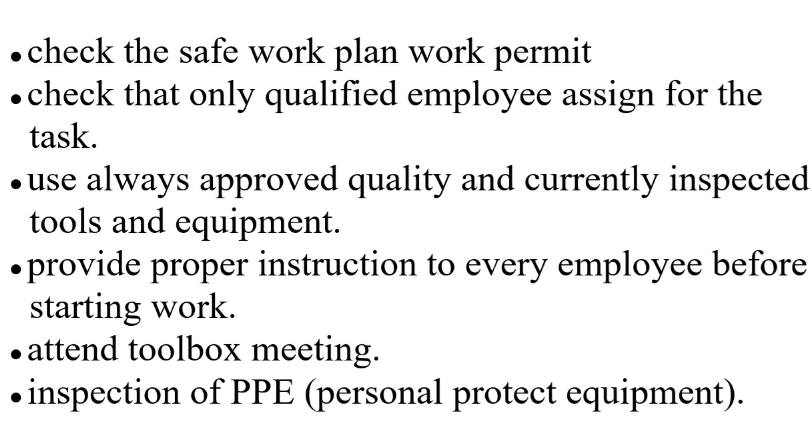Attend toolbox meeting. Inspection of PPE, personal protective equipment. Inspection of power tools, hand tools, fire prevention, fire extinguishers, powered generators etc., correcting unsafe conditions. Inspect signs and barricades. Inspection of color code system. Gas testing if work in confined space.

Visit the job site, check condition of work and practices of people. Report any accident and incident immediately to safety manager. Provide awareness about safety among employees. Prepare daily safety report. Check the grounding of machine connection, especially working under overhead lines and in the vicinity of substation.

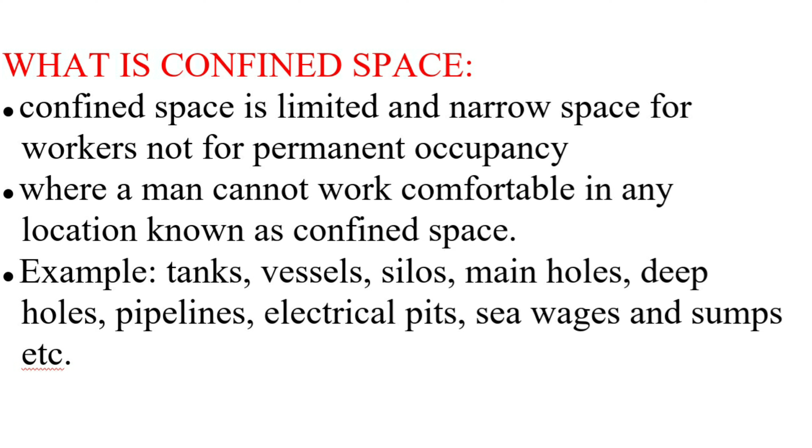What is confined space? Confined space is a limited and narrow space for workers, not for permanent occupancy, where a man cannot work comfortably, in any location, known as confined space. Example: tanks, vessels, silos, manholes, deep holes, pipelines, electrical pits, sewages and sumps etc.

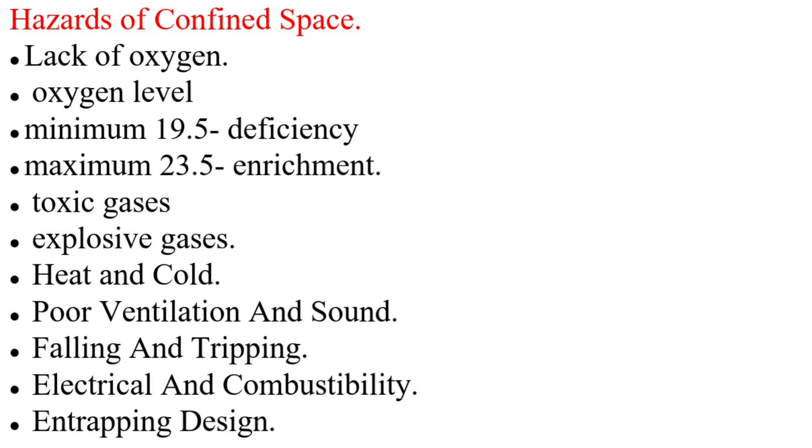Hazards of confined space. Lack of oxygen. Oxygen level, minimum 19.5% deficiency, maximum 23.5% enrichment. Toxic gases, explosive gases. Heat and cold. Poor ventilation and sound. Falling and tripping. Electrical and combustibility. Entrapping design.

Prevention precaution of confined space before entering, confined space entry permit. Check the oxygen level, between 19.5% to 23.5%, gas testing, LEL, lower explosive limit, the minimum concentration of combustible and flammable gas or vapor that will ignite if an ignition source is present, LEL 0.05% to 0.5%. Carbon monoxide, 0%. H2S, hydrogen sulfide, 0%, barricade.

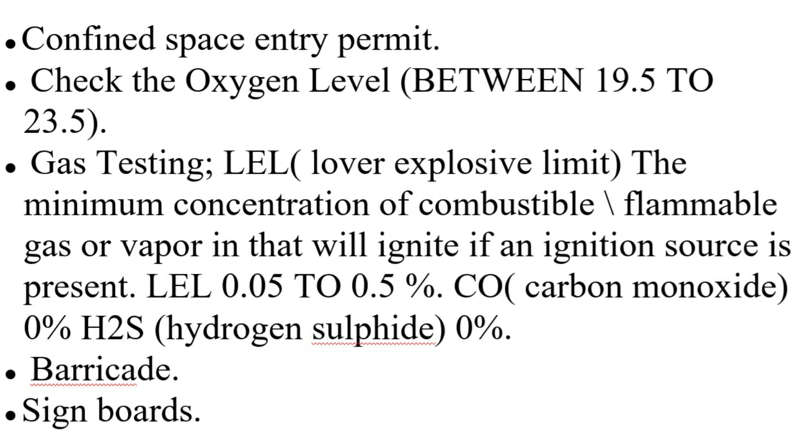Signboards. Lifeline and communication. Emergency fire alarm. Safety access. Air horn. Proper PPE. Ventilation, air. Illumination, proper light, inside confined space 24 volts, keep all material out of space and only tools mentioned on permit may enter. Welding gas cylinders are not permitted inside the confined space. After completion of work or invalidity of permit, install no entry.

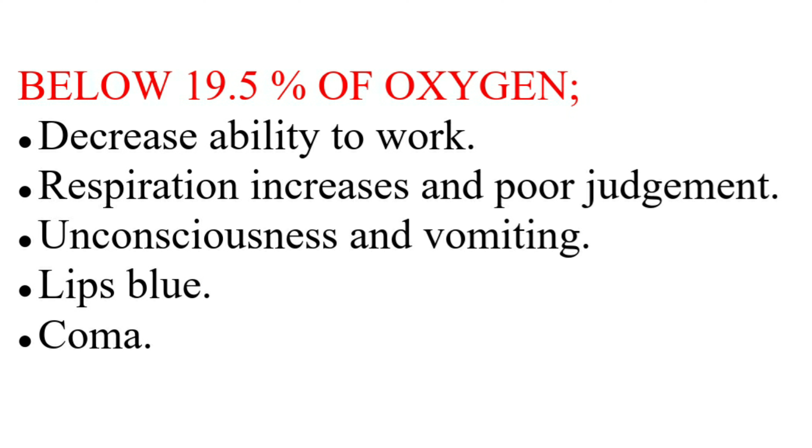Below 19.5% of oxygen, decreased ability to work. Respiration increases and poor judgment. Unconsciousness and vomiting. Lips blue. Coma.

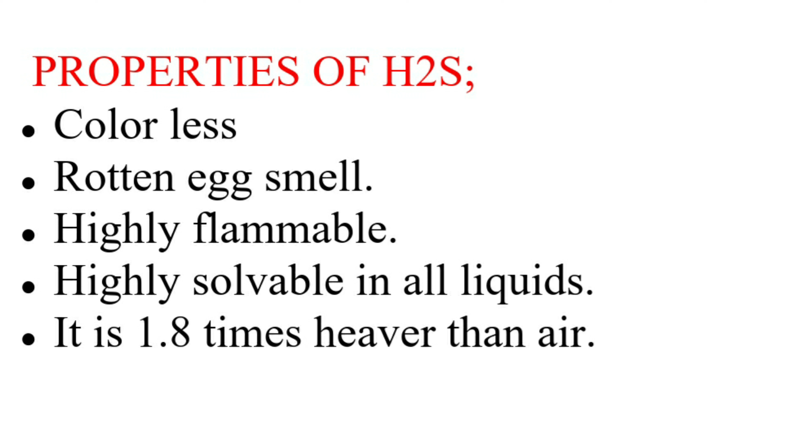Hydrogen sulfide, H2S. H2S is one of the toxic gases and it is very harmful to the human body. Properties of H2S: colorless, rotten egg smell. Highly flammable. Highly soluble in all liquids. It is 1.8 times heavier than air. Effects of H2S: eye irritation, throat irritation, loss of smelling sense, irritation of lungs, death.

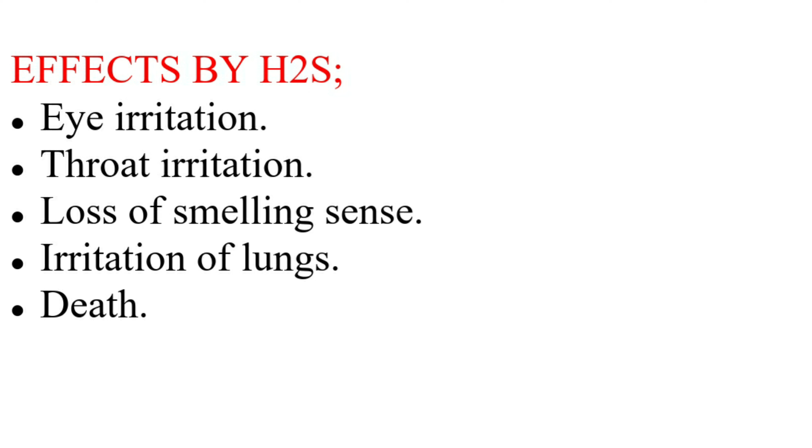Survive from H2S. First we have to watch the direction of the wind by wind socks. After that we have to move in the crosswind direction. After burning, sulfur dioxide will be released. It is very toxic. It smells from 0.13 ppm.

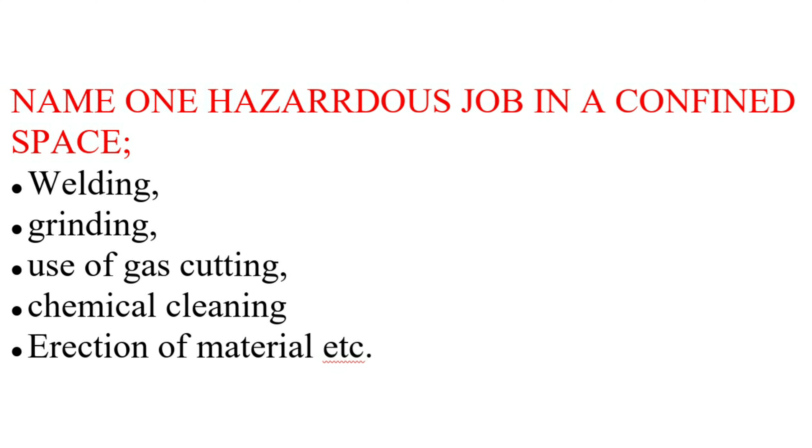Name one hazardous job in a confined space. Welding, grinding, use of gas cutting, chemical cleaning, erection of material, etc. In what circumstances can a work permit be issued? If properly ventilated, gas testing is satisfactory, properly barricaded, warning signs are posted, trained standby man present with log sheet, sufficient lighting and low voltage electricity, 24 volt. Proper means of communication, lockout and tagout if necessary, and lifeline.

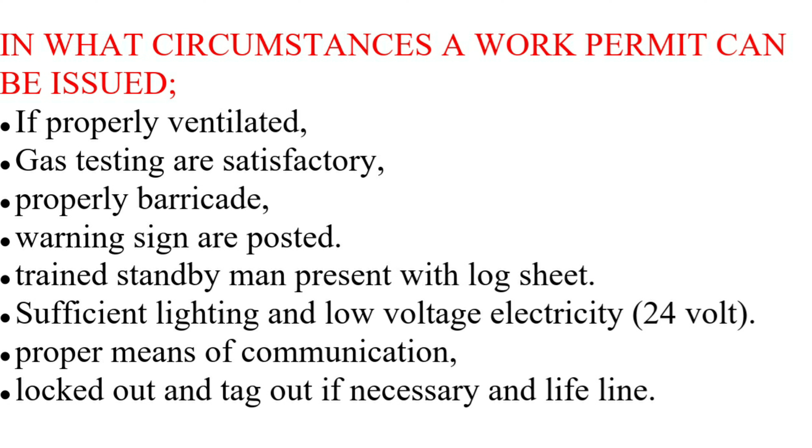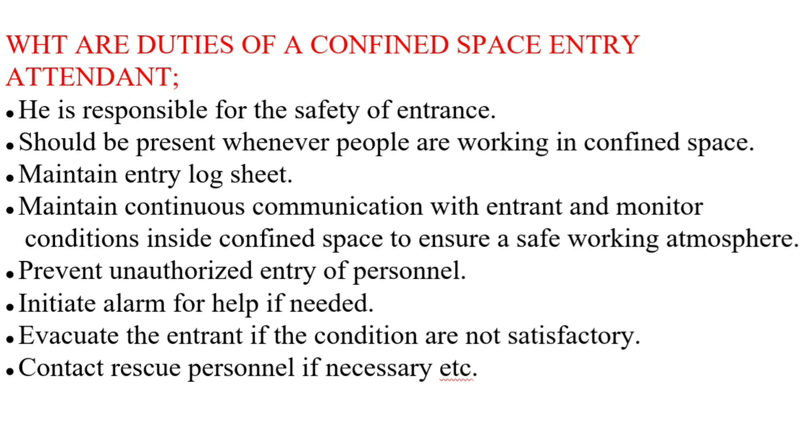What are the duties of a confined space entry attendant? He is responsible for the safety of entrants, should be present whenever people are working in confined space. Maintain entry log sheet. Maintain continuous communication with entrant and monitor conditions inside confined space to ensure a safe working atmosphere, prevent unauthorized entry of personnel. Initiate alarm for help if needed. Evacuate the entrant if the conditions are not satisfactory. Contact rescue personnel if necessary, etc.

Action in case of plant emergency. Stop work immediately and shut down equipment. Ask workers inside the confined space to come out. Make sure all workers have evacuated. Take people to safe assembly area. Conduct head count and wait for instruction.

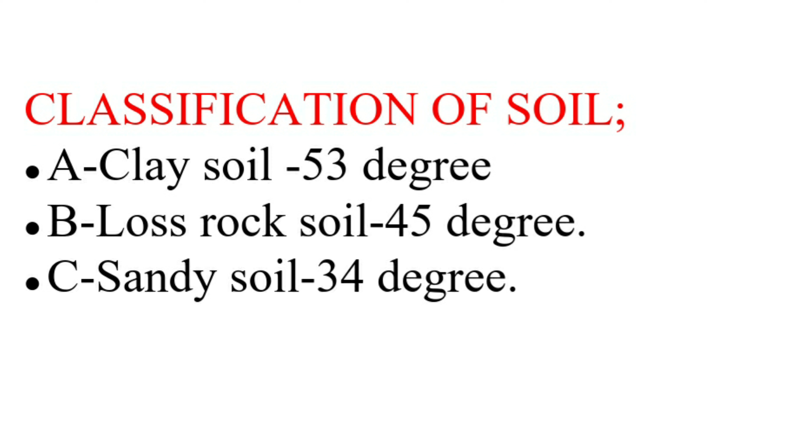Classification of soil: A. Clay soil, 53 degrees. B. Loose rock soil, 45 degrees. C. Sandy soil, 34 degrees. Hazards of excavation: lack of oxygen. Collapse hazard. Falling hazard. Water accumulation. Underground utilities such as power lines, pipelines, etc. Toxic substances.

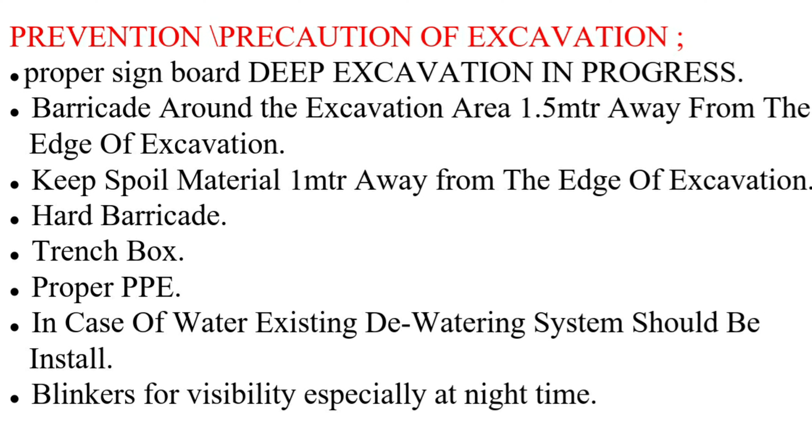Prevention precaution of excavation. Proper signboard: deep excavation in progress. Barricade around the excavation area 1.5 meters away from the edge of excavation. Keep spoil material 1 meter away from the edge of excavation. Hard barricade. Trench box. Proper PPE. In case of water, a dewatering system should be installed. Blinkers for visibility, especially at night time.